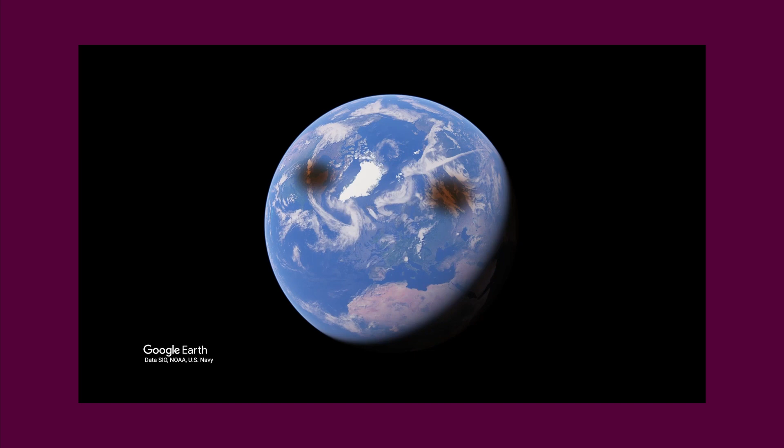We are the life on the blue planet. A planet in constant development where human innovations are supposed to lead to a better future. But there are some things that don't seem as promising. Our electricity grids, water and sewage networks are overburdened. And as the population grows larger, the health of the cities decrease and the planet becomes less blue.

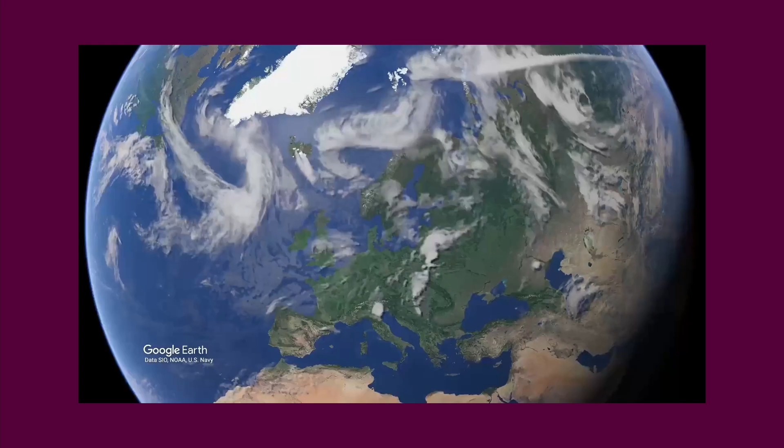We need to address this burden and build homes that are independent from the common networks, and start aiming for off-grid solutions within cities as well. This is Jönköping, but it might as well have been any other city, because if our concept works here, it can work just about anywhere in the world.

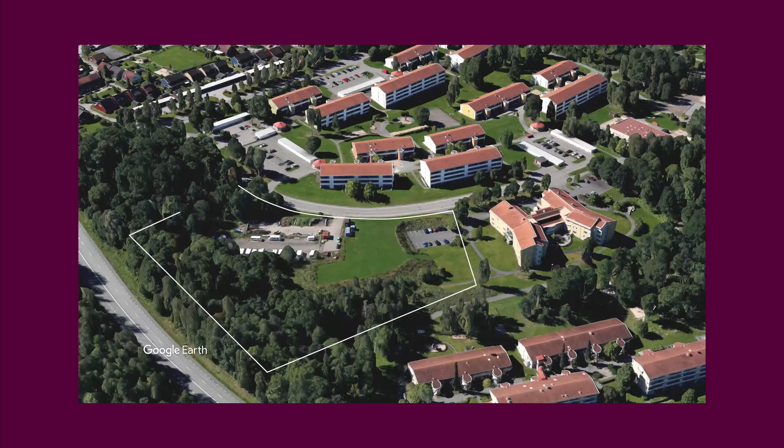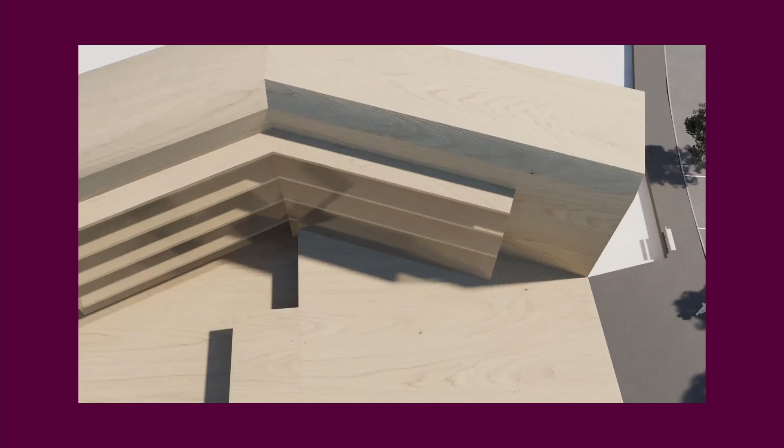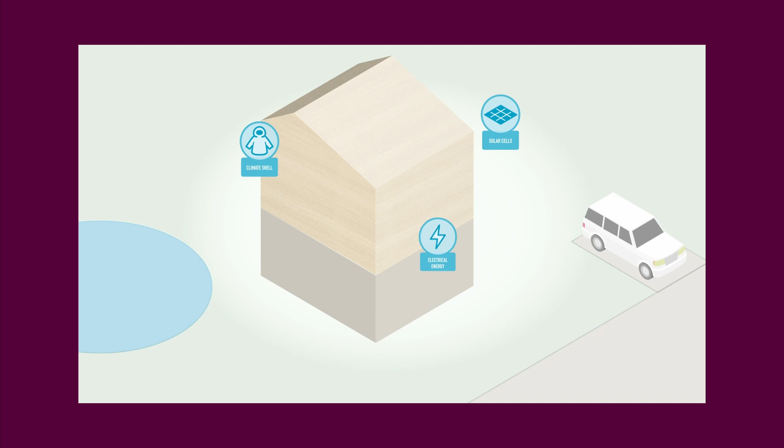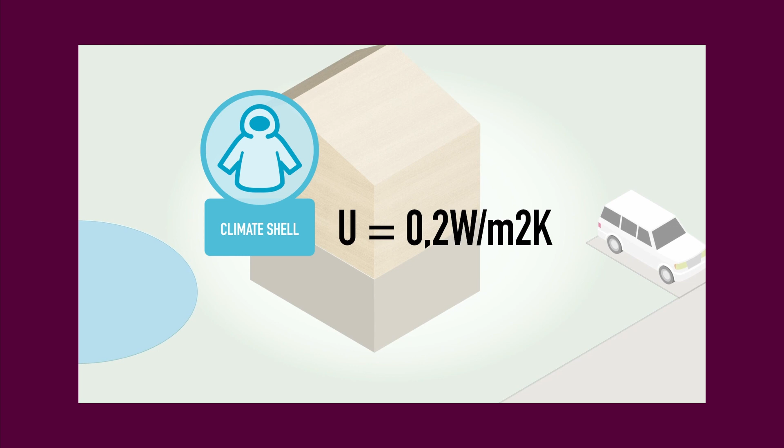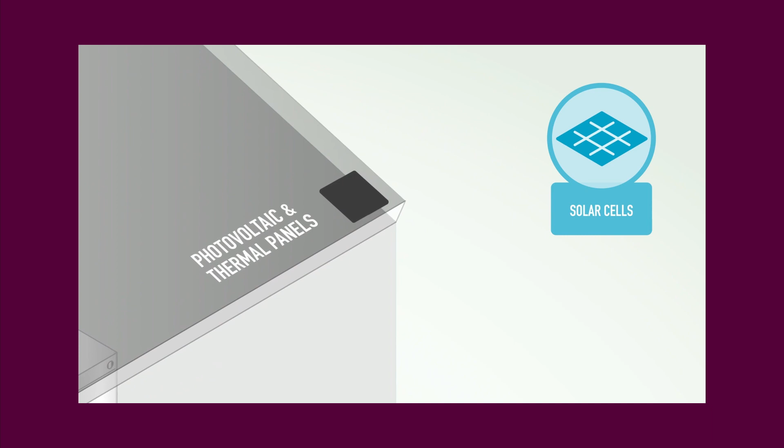In this concept, the building envelope will keep a level of isolation that is at least equivalent to that of a nearly zero energy building. We prefer wooden houses, but you can use just about any construction technology. The main energy source will come from solar panels, which will be placed on both the roof and facades. The extracted energy will be stored in batteries that power the house.

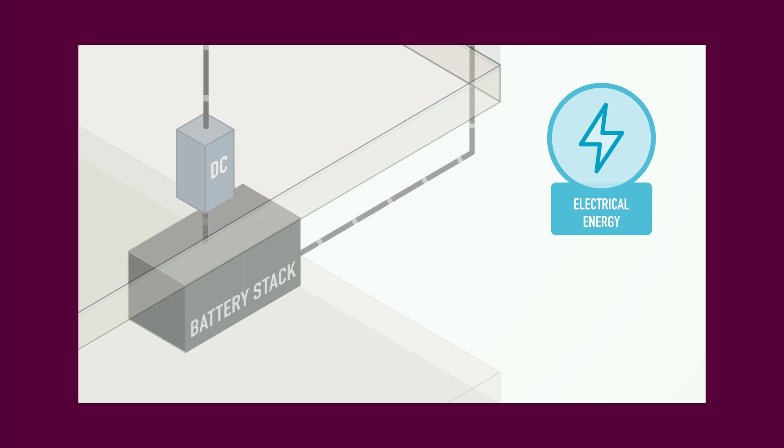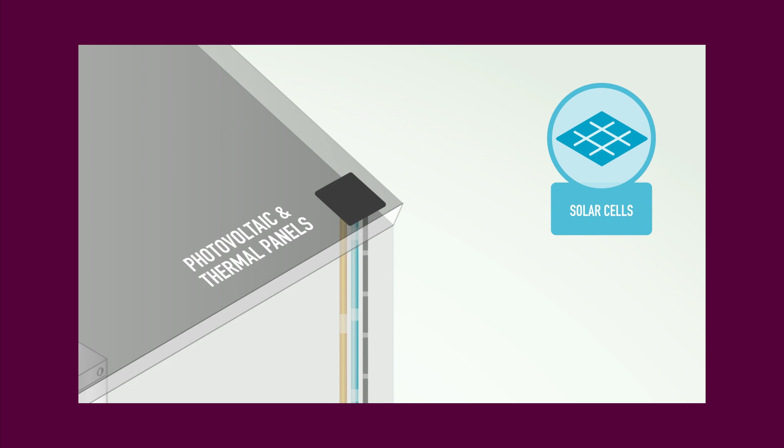Some functions in the house can be run by direct current, and others need 230-volt alternating current. When solar panels get overheated, they lose efficiency and shorten their lifespan. To avoid this, we cool them down using liquid, and once the liquid warms up, we can use the thermal energy in other aspects of the house, and the solar panels remain efficient and last longer.

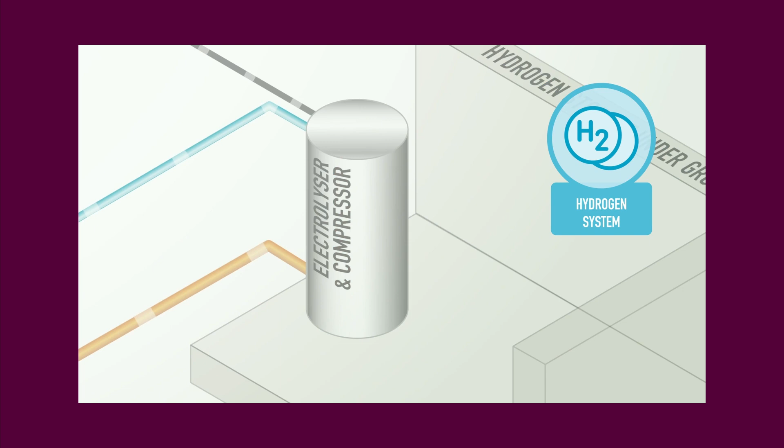The hydrogen system stores energy from summer to winter. When the batteries are fully loaded, the excess energy gets transported to an electrolyzer, which splits water into oxygen and hydrogen. The process gives us a hot water flow of 65 degrees and additional energy for the house. The hydrogen gas is compressed and stored in tanks.

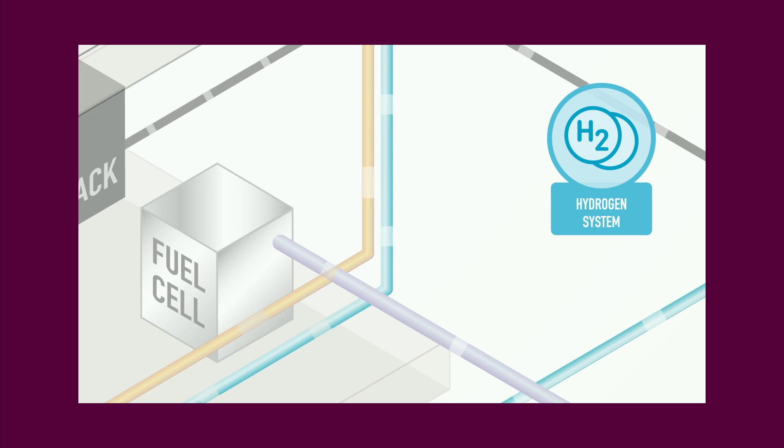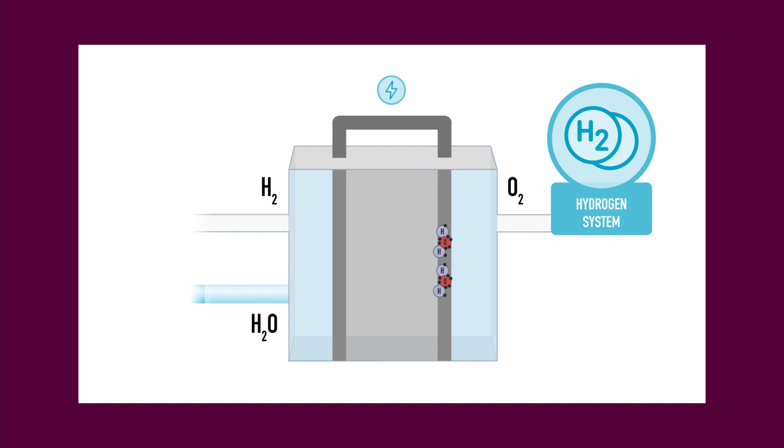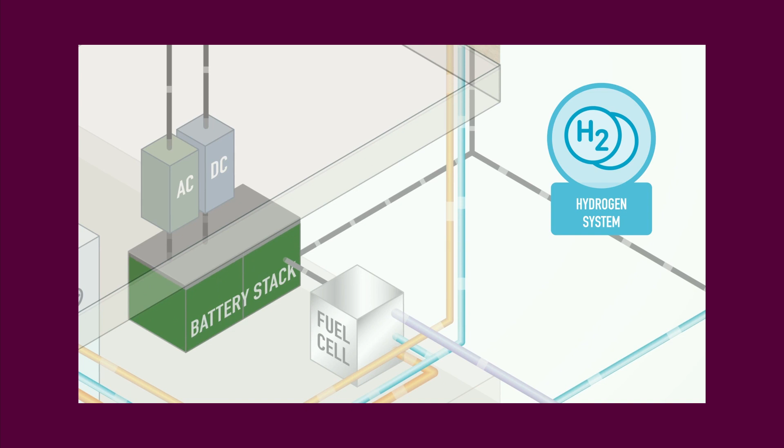During the colder half of the year, when the solar panels won't supply as much energy, the hydrogen gas will be transported to a fuel cell. Adding oxygen will create a chemical reaction inside the fuel cell, and the stored energy will come out as electricity. Water is used to cool the process. The electricity gets transferred to the batteries, and the house gets a hot water flow of 55 degrees. Any excess electricity or hydrogen gas can be used to fuel vehicles.

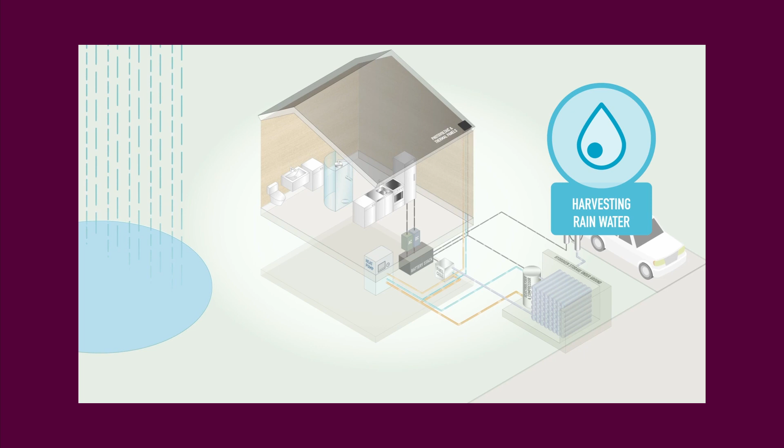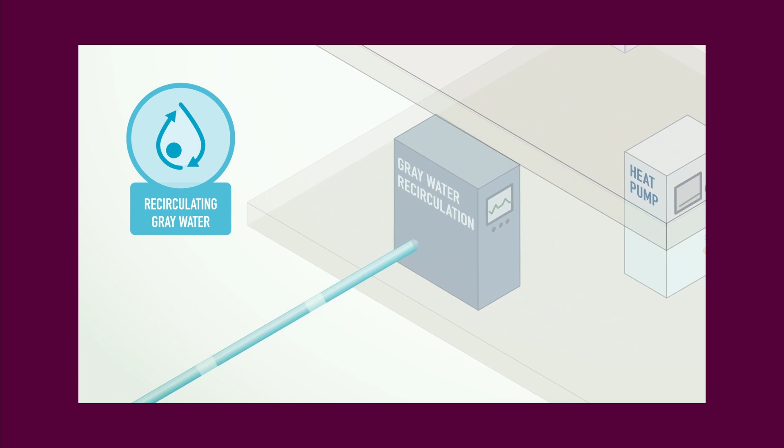80 to 90% of the water supply comes from rainfall. All stormwater from the buildings and the lot will be collected in a pond, which acts as a water storage. The water is led through a sand filter before it continues into the building's purification center. This is also where the warm grey water from the house gets purified.

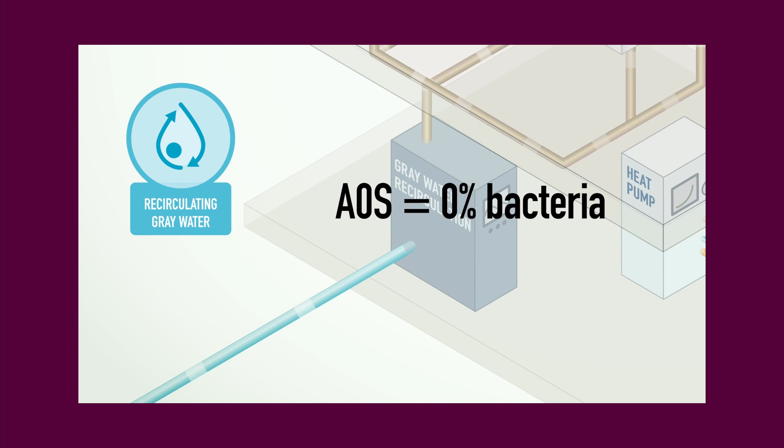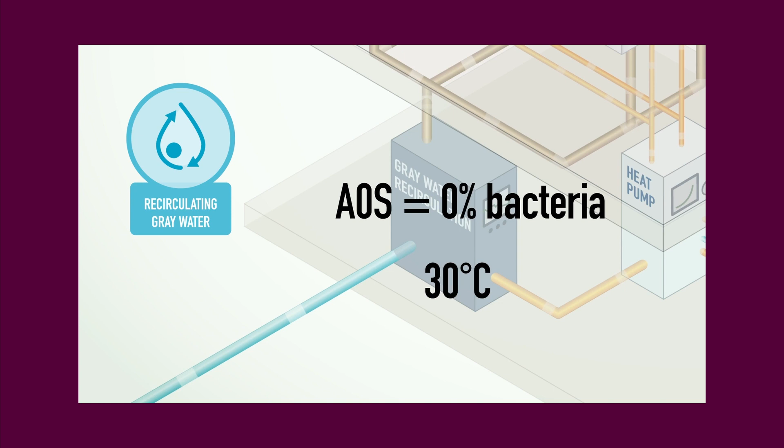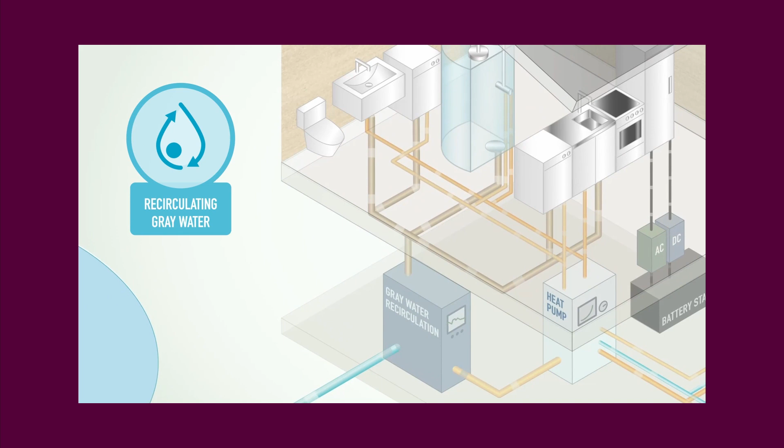In the purification process, we use mechanical filters that remove particles down to 0.01 micron, as well as advanced oxidation process and an after-treatment with UV light. We now have clean water of 30 degrees circling in the building. The conductivity of the grey water is measured continuously, and any water that is considered too dirty is momentarily transferred to the toilet drain. By purifying and recircling the grey water, we save up to 90% of the water consumption.

In order to achieve a pleasant water temperature, we heat the water to 45 degrees. This saves approximately 75% of the energy used to heat water. Because of the water's purity levels, no biofilm can be formed in the pipelines. This way, we avoid Legionella despite the water only being heated to 45 degrees. But when it comes to drinking water in our kitchens and bathrooms, we don't really want a temperature of 30 degrees. And cooling purified grey water is a waste of energy.

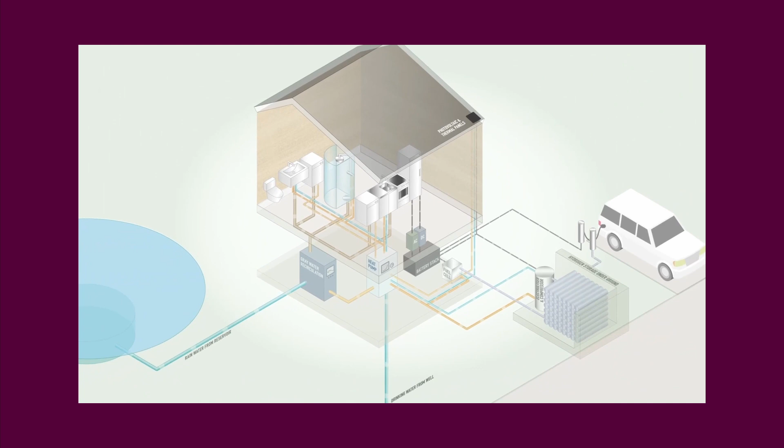So instead, cool drinking water is collected from a well, which also acts as a backup if we run out of rainwater. The collected rainwater also supplies us with toilet water.

The purification of the black water is based on biomimetics, which is similar to the natural cycle. The toilet water is transported to a biological purification center, completely free from chemicals. The first stop in the purification center is an oxygen-deficient tank, where microbes clean the water to such a good level that we don't need any sludge emptying.

Next, the water is pumped into a heavily oxygenated tank, where flow, plants, root systems and bugs finish the purification. As opposed to nature, this process only takes 12 hours. The final product is clear, drinkable water, but we only use it to flush, again and again and again.

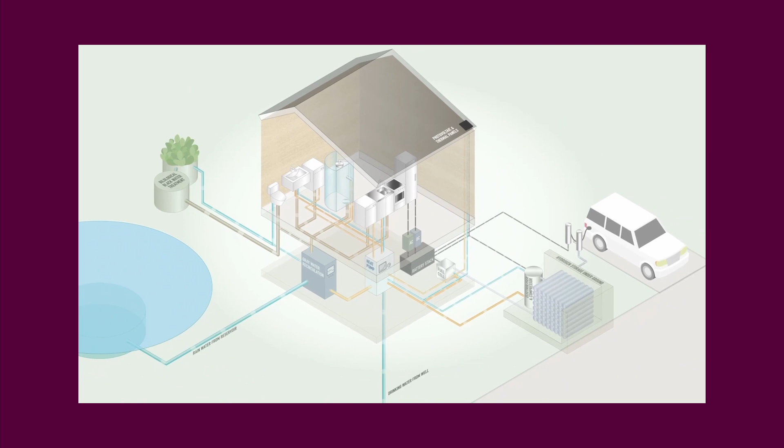The heat pump is the heart of the heating system. The house generates large flows of thermal, liquid-borne energy. The solar panels generate a flow of 20 to 40 degrees in the summer. During the warm half of the year, the electrolyzer generates 65 degrees, and during the colder half, the fuel cell generates 55 degrees. The recirculation of the grey water sustains at 30 degrees.

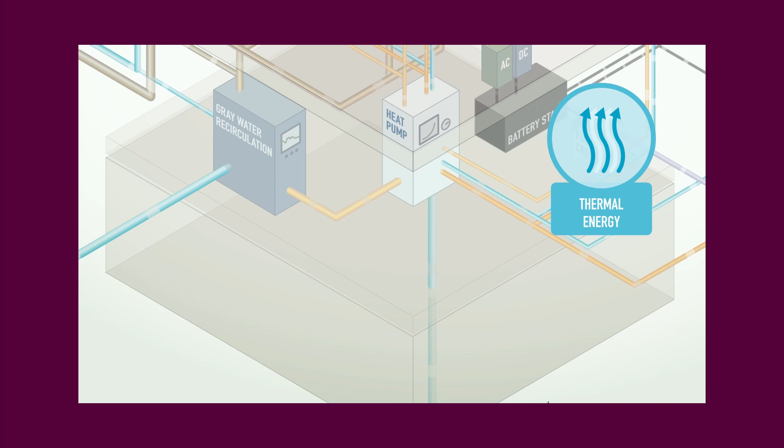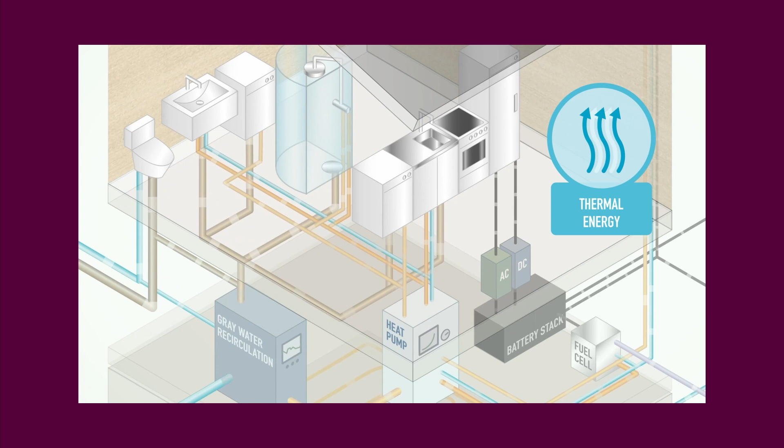During the summer, we will get an excess of thermal energy which we can save till winter. The energy is saved in a geothermal layer underneath the house, where it's stored in rock flour and collected through a thin pipe with liquid. The amount of thermal energy makes it a given to use liquid-borne floor heating in the apartments.

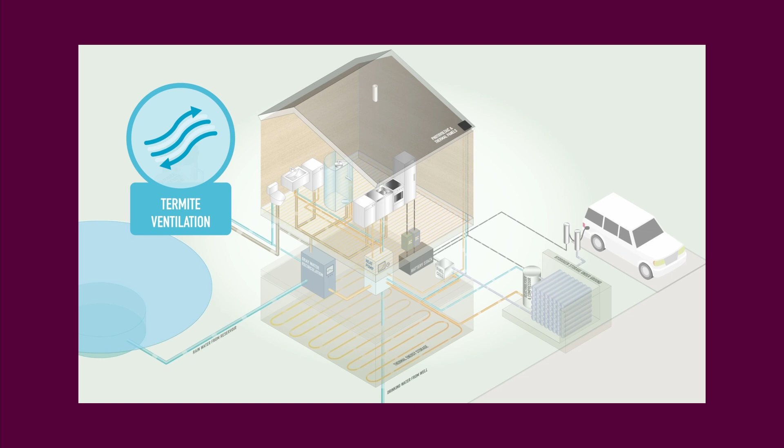In order to have a good and healthy indoor climate, ventilation is perhaps the most important function. During millions of years, termites have developed a natural ventilation system, which has been our inspiration. The outdoor air is led into a slow flow through the ground. During the winter, the cold air gets heated by the ground, and during the summer, the warm air gets cooled by the ground. This gives us a constant flow of 14 to 16 degree air into the house.

The air culvert is about 2 meters in diameter. This gives us a slow flow, and all particles down to 0.4 micron land at the bottom of the culvert. Gravity filtrates the air and removes dirt and allergy-causing particles in a natural manner. The culvert only needs vacuuming once every other year. To ensure a constant slow flow, we install an axial fan where the air can enter the basement.

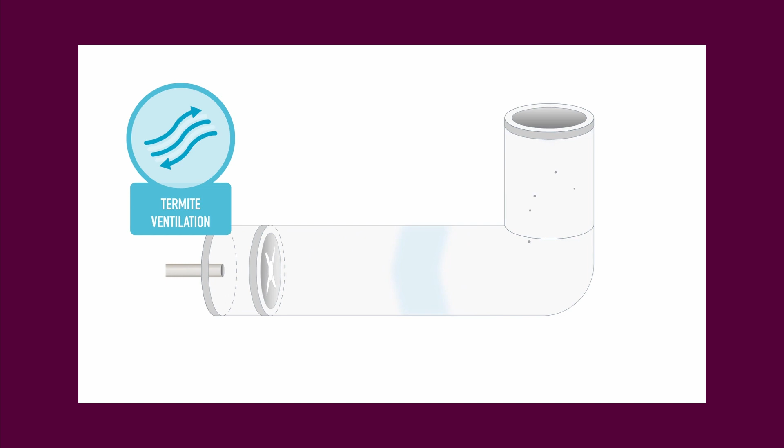The thermal air is led through a canal to every apartment. The temperature in the apartment is balanced between the air inlet, people, heat-generating devices, and the floor heating. Because of the air inlet's constant temperature of 14 to 16 degrees, we won't need any cooling in the summer. The relative humidity will automatically become a very healthy 30 to 70%. With termite-inspired ventilation, we can avoid dry air during the winter, which gives us a healthier indoor climate.

The used heated air leaves the apartment through natural extraction. Smart bathroom and kitchen fans can be used where the air needs enforcement. Compared to a modern, highly effective FTX ventilation system, the energy consumption will be halved.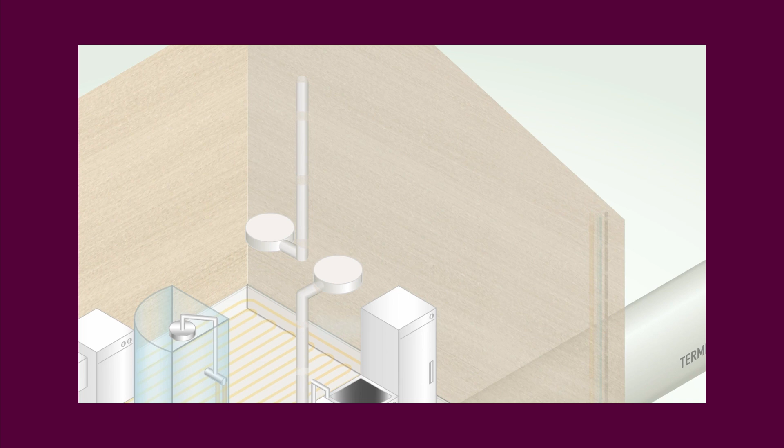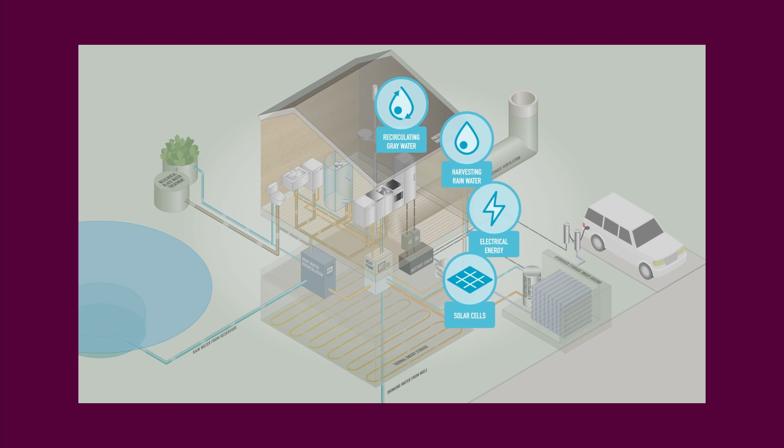The YEAR concept is a self-sufficient building that does not burden the already overburdened common networks. The YEAR concept can make a difference in our lives, a difference to our climate, and a difference to our still blue planet. The concept is thought out and assembled by Yellon, but it would not have been possible without the expert groups and institutions involved.